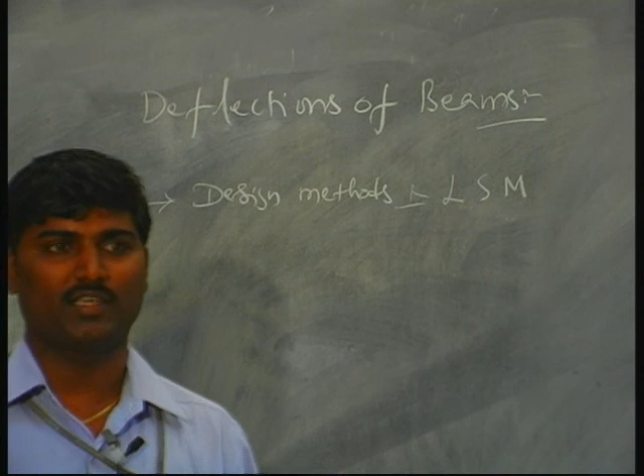Beam deflections are necessary after the limit state method has come into picture. The design methods of beams, the three methods of beam design are ultimate load method, working stress method, and the latest is limit state method. Limit state method requires that any structural member should be safe as well as serviceable. These serviceability conditions have been incorporated in this method. It is adopted in the latest IS code. Hence, deflection calculations are a must to design any structural member using this limit state method.

Working stress method was the method which ensures the safety of a member, whereas limit state method ensures both safety as well as serviceability. Service in the sense, say if in a room a beam deflects excessively, we cannot sit in that room comfortably. A psychological feeling arises that the beam is going to fail; it won't actually fail, but excessive deflection makes you feel that it is going to fail. That is psychological failure of a beam. So, to avoid that, we need to calculate the deflections of structural elements like slabs and beams.

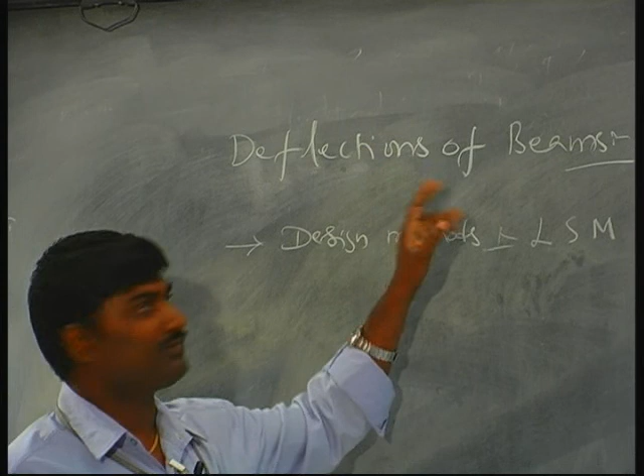Not only that psychological feeling, the flooring will also be damaged. In some buildings, when you walk on the floor, you feel a different sound when you touch any tile. When you put a foot on the tile, we feel a different sound, meaning it has lost its contact with the slab or floor, meaning that the slab has deflected. So the tiles cannot deflect the same amount; the slab deflection cannot cooperate with the tile since the tiles are flat.

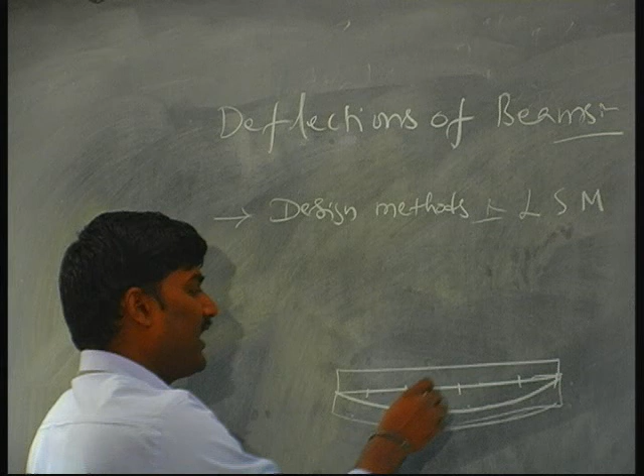Once this top length gets reduced, the tiles have to come closer together, but that facility was not provided. So the tiles will be broken, and sometimes there is removal of the joint between the tile and the floor. This is the problem with excessive deflections in structural elements like slabs and beams.

So, this is the background information on why deflection calculations are required. Deflection calculations are a must to see that a beam serves throughout its designed lifespan and does not cause any damage to non-structural elements like flooring, tiles, or the cover provided for the slab.

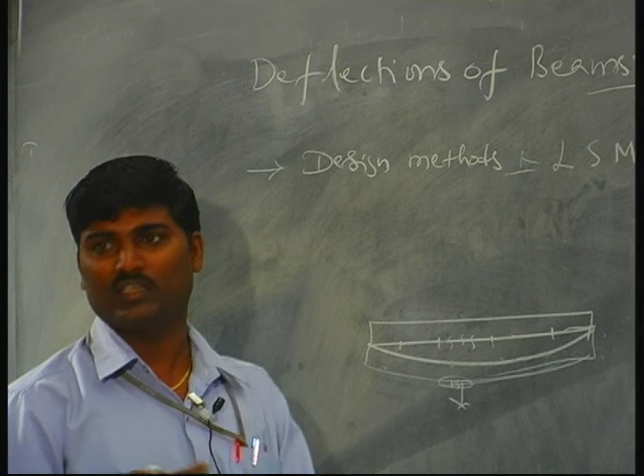Sometimes you will see the cover removed from the slab, and you can see the reinforcement. That problem is because of excessive displacement. Cracking of tiles occurs at the top, cracking of cover occurs at the bottom and falls down, removing cover from the slab, and you can see the reinforcement. Once reinforcement is exposed to the environment, environmental attack happens, rusting, and all that takes place. Steel will no longer serve its job, so failure of reinforcement is failure of the element itself. Because of all these reasons, we want the deflections of beams to be calculated.

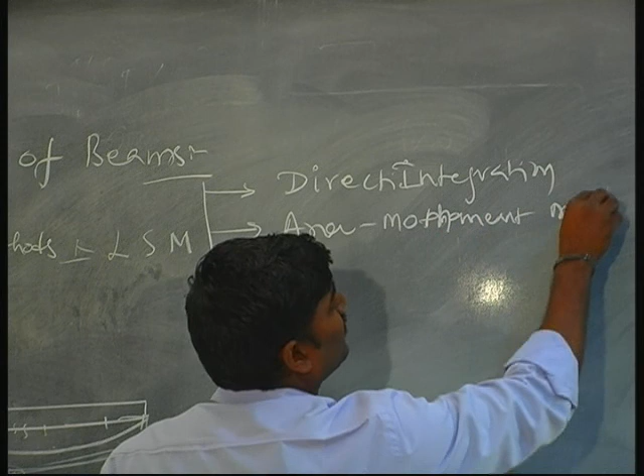There are different methods to calculate beam deflections. The first method is the direct integration method. The second is the area moment theorem, or area moment method. The third is the conjugate beam method. There are three methods to calculate deflections of beams.

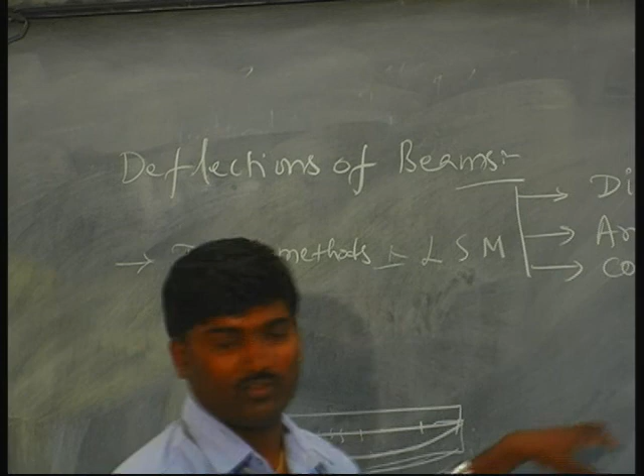Direct integration method was developed by Bernoulli, Jean Bernoulli. You may be knowing this name, a famous name. Scientist Bernoulli developed this method, and it was further extensively used by Euler. After its development by Bernoulli, it was extensively used even for columns by Euler. Euler applied this concept to columns also.

Area moment method is a geometrical one, a simplified geometrical method. That was developed by scientist Mohr. Conjugate beam method is a special case of the area moment method. Each method has its own advantages and disadvantages. We will go on to discuss each one.

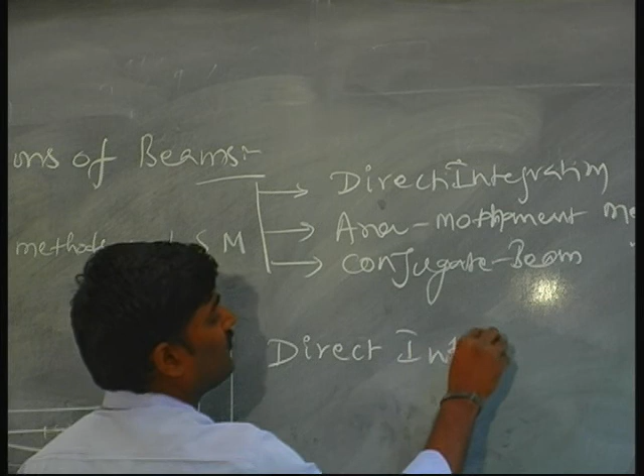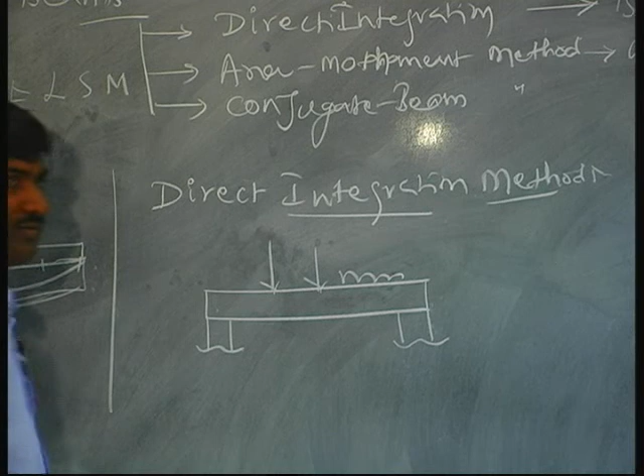First, coming to the direct integration method. It involves integration of some equation to get the deflections of beams. We need an equation which represents the deflected shape of a beam. Generally, a beam is an element where lateral loads prevail on it, provided with some type of support, commonly simply supported, cantilever, or overhanging. If any beam is loaded with lateral loads, it will bend.

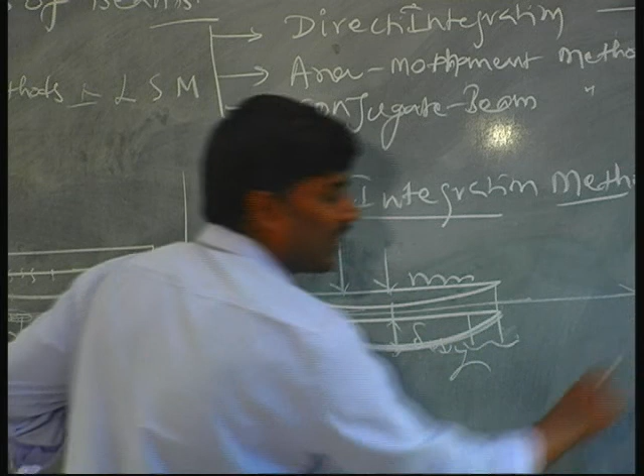The amount of deflection, delta or y, if you have an equation for this curve, I can calculate the value of deflection anywhere I want. For example, if you say this is the x coordinate and y coordinate of the curve, points on the curve will be represented by x, y coordinates.

X denotes the location where we want deflection, y denotes the value of deflection in a beam. If we can have an equation for this, I can find the y value wherever the deflection is required.

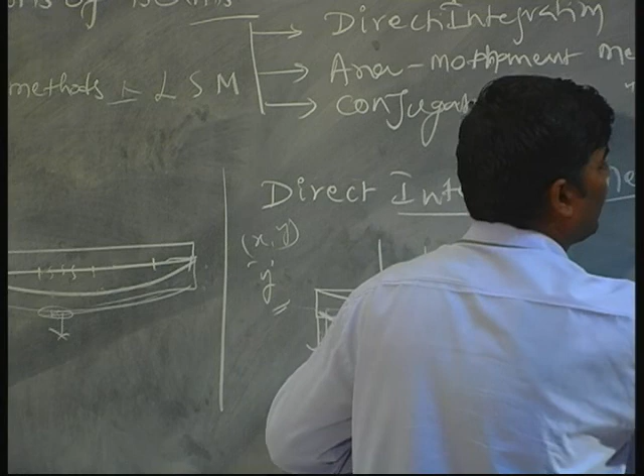The development of the equation for this deformed shape is done in two steps. First, relating strain of a chosen fiber layer in a beam with the curvature of the beam - strain and curvature relation must be established first. Next, moment curvature relationship must be established. Two steps are required to develop an equation for the deformed shape of a beam under loading.

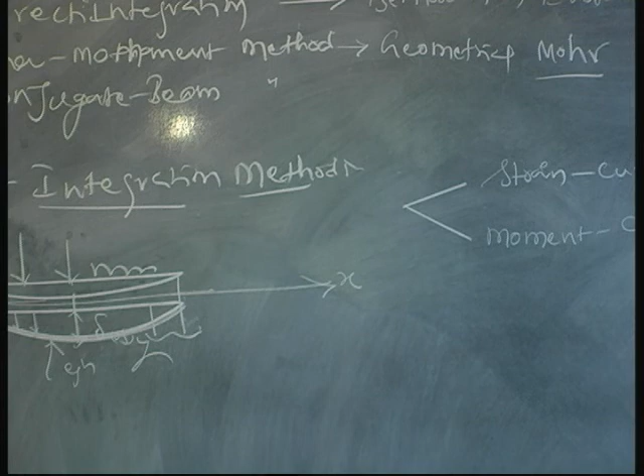These two steps are in fact from simple bending theory or pure bending theory, already discussed in semester 1. Simple bending theory gives you these two relations.

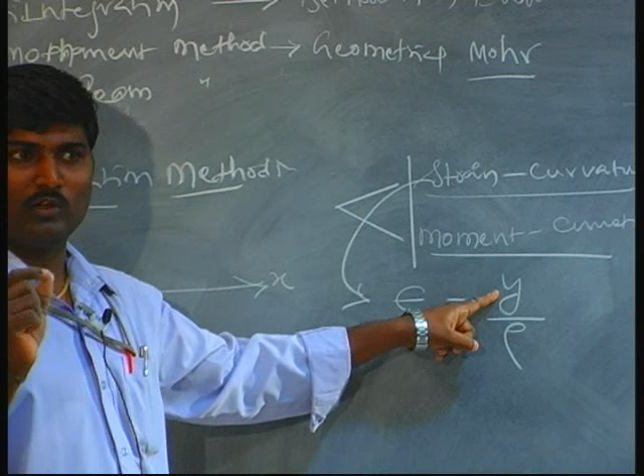I will straight away give these relations. Strain curvature relationship: strain in any layer of a beam is equal to y by rho. Y is the location where the fiber or layer is selected. Rho is the radius of curvature of the bent shape or curve. When you load the beam, it bends in the form of a curve, and the geometrical property of this curve is radius of curvature and curvature - 1 by rho is curvature, rho is radius of curvature. So this is the strain curvature relationship.

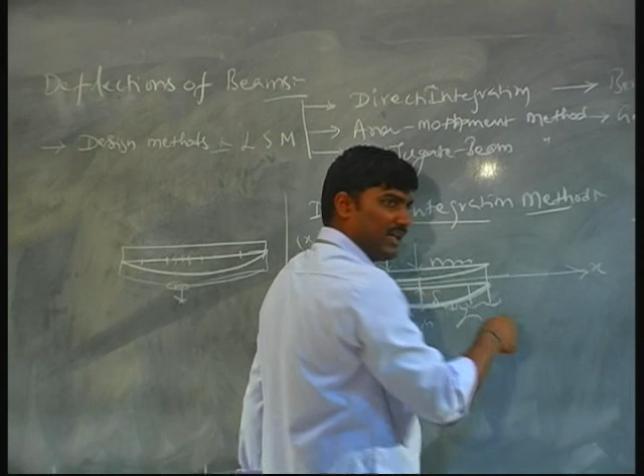Moment curvature relationship is given by the simple bending equation from the first semester: m by I equals sigma by y equals e by rho. From this we have the ready-made moment curvature relationship and strain curvature relationship.

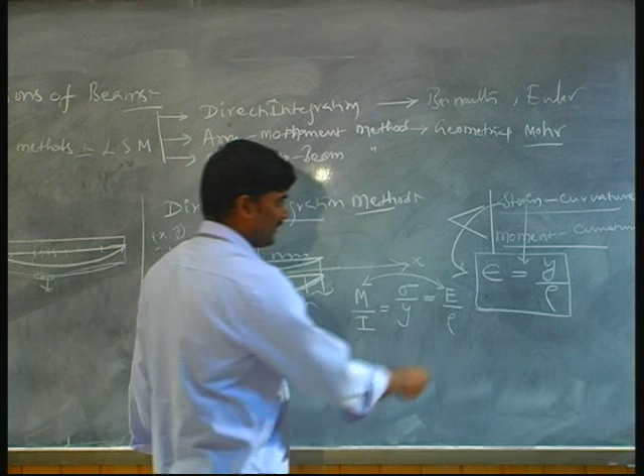Combining these two, we can develop an equation for the curvature of this curve. How do we do that? This is the strain from geometry. We equate that strain from geometry to the strain from theory.

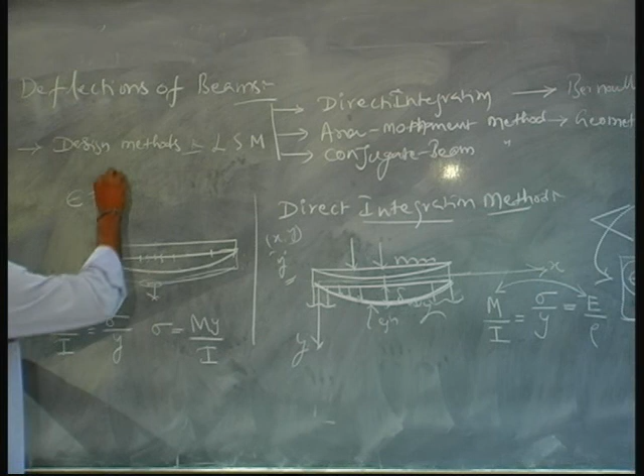From theory, m by I equals sigma by y, where sigma equals my by I. Strain from Hooke's law is stress by Young's modulus. Strain from theory, where sigma equals my by I, gives my by EI. This is the strain at any layer in a beam from theory. Equating strain from geometry and strain from theory: my by EI is equal to y by rho.

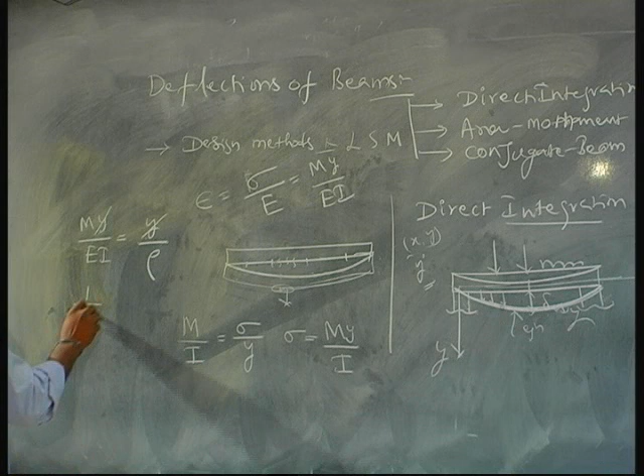Y gets cancelled, so 1 by rho equals m by EI. 1 by rho is the curvature of this bent shape.

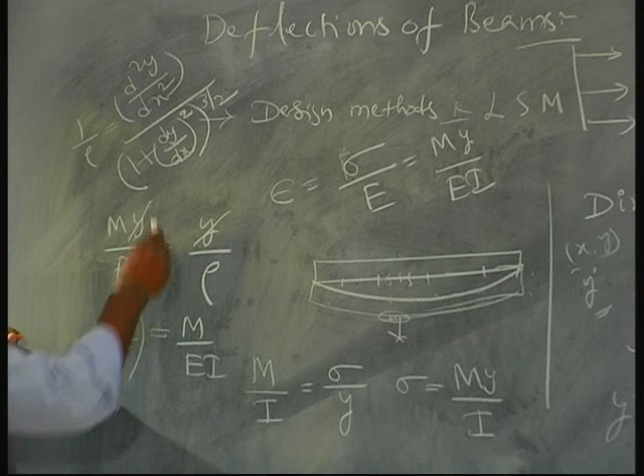From analytical geometry, curvature of any curve can be written in Cartesian coordinates as d square y by dx square, divided by 1 plus dy by dx whole square, whole to the power 3 by 2. This is the curvature of a curve from analytical geometry in the Cartesian system, where the denominator consists of the slope dy by dx.

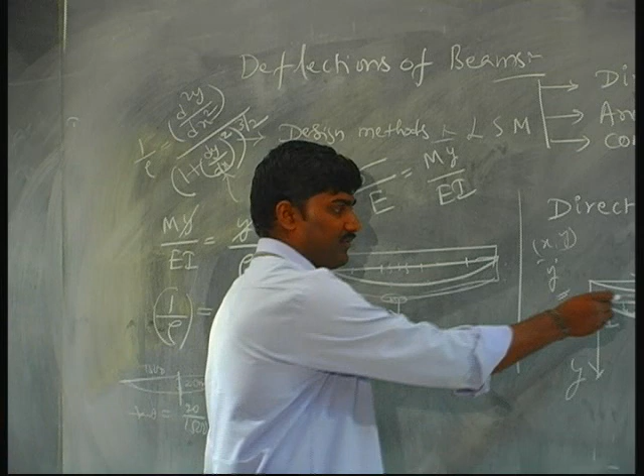For practical cases of beam deflections, generally the beam length is of the order of 3 to 5 meters, say 3000 mm, deflecting by a nominal amount of 20 mm. So the slope of this bent shape: tan theta is 20 by 1500, which is a very small number. So slope is negligible in the case of beams bending as a curve.

So if you neglect this slope, the curvature becomes d square y by dx square. Neglecting this value as negligible, putting it as 0, 1 to the power 3 by 2 makes the denominator become 1, and the numerator d square y by dx square remains the same. So in place of 1 by rho, we replace it with d square y by dx square. This is the expression which helps you to find deflection.

X comma y are the coordinates of points on the curve. Y denotes the vertical coordinate of a point on the curve, which is nothing but deflection. So d square y by dx square equals m by EI, the bending moment at any section relating to deflection. This equation relates bending moment with deflection.

We have a question that in beams, the internal forces generated are three: axial, shear, and bending.

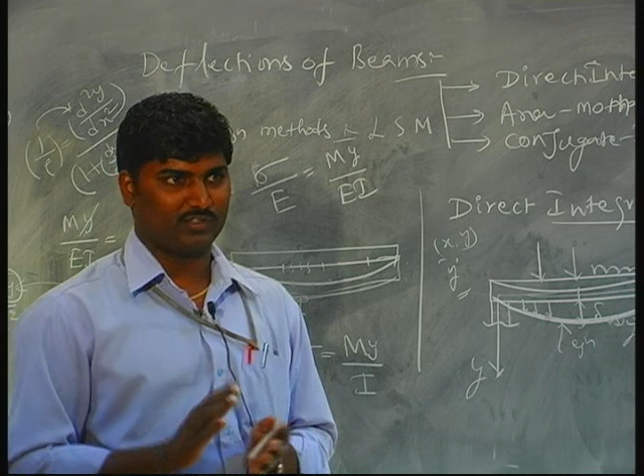Coming to the other two, bending moment and shear force. Shear force is there, but what we are doing here is considering only bending moment; shear deformations are also there but they are neglected. There are theories developed for finding shear deformations also, but they say that compared to deformations created by bending moment, shear deformations are very very less, you can neglect them.

So in total, because of lateral loading on a beam, the deflections can be conveniently calculated without much error with this formula. So the final formula I can give you to calculate deformations by the integration technique, direct integration technique, is d square y by dx square.

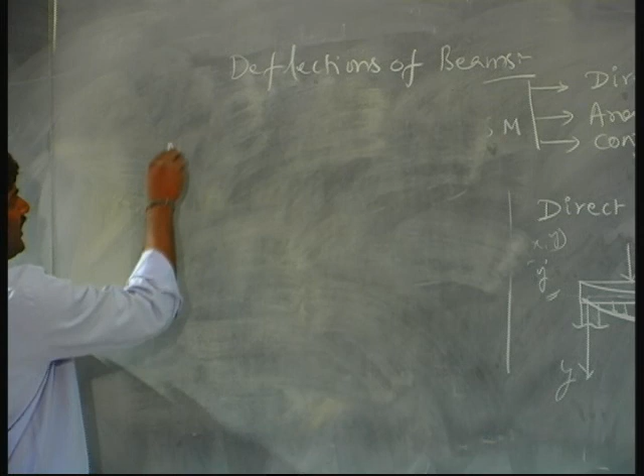This is the equation which relates bending moment to deflection. If we want the y value, we need to integrate this equation twice. That is why the name related to the integration technique is given based on the idea that we have to integrate the equation of the elastic curve, that is the bent shape of the beam, so that we will get the deflection value.

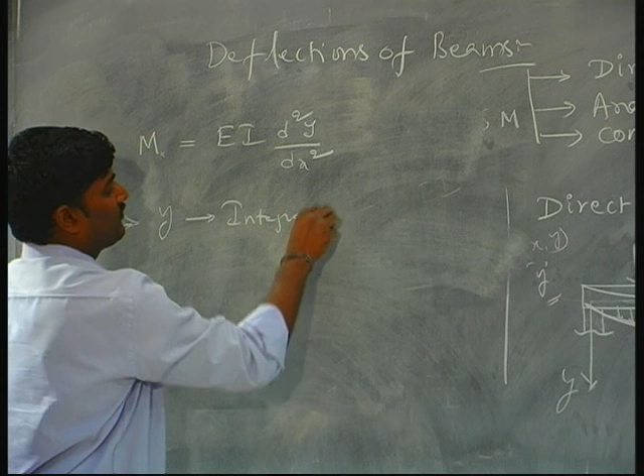So in the integration process, we need to integrate twice to extract y from this. So integration should be done twice. There will be two integration constants, namely C1 and C2.

To evaluate C1 and C2, we must use some known conditions, the boundary conditions, such as depending on the types of supports provided to a beam. Say for example, if you have a cantilever beam fixed at one end and free at the other end, the boundary conditions, that means known conditions to solve the integration constants, are needed.

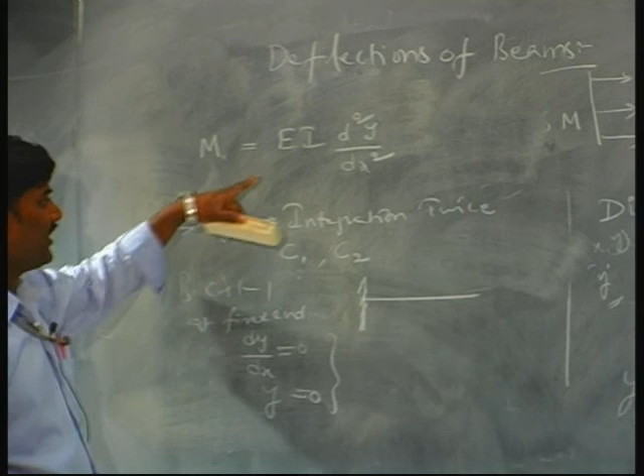At the fixed end, slope is 0, dy by dx is 0, and deflection is 0. Using these two known conditions, which are the boundary conditions, you can estimate y from this equation. This is the direct integration technique which helps you find deflections in a beam.

Let us see an example of how this method is used. A simple example to estimate deflection at any location where you want, using this method. Take a cantilever of length L, which is loaded by a concentrated force P at the free end.

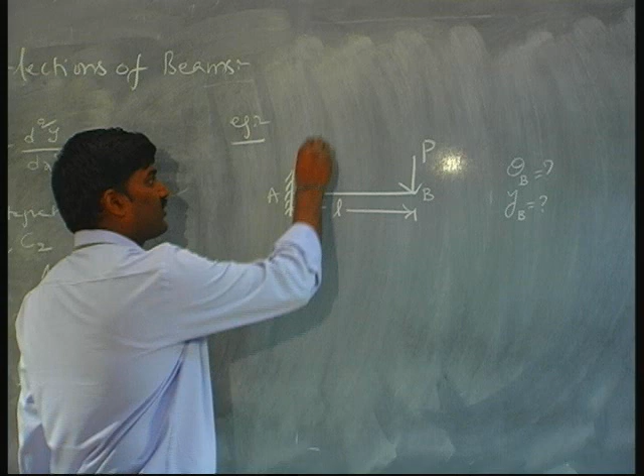Notate the beam AB. I am interested in the slope at B and the deflection at B. To calculate slope and deflection, we know that the beam has got some cross section, so it will have some I value. The beam will be made of some material, maybe steel or concrete, and it will have a Young's modulus.

So, coming to applying this equation to that beam to calculate deflection, let us consider a section where we want to write the moment equation. So consider a section x at a distance of x from A or from B, from either end.

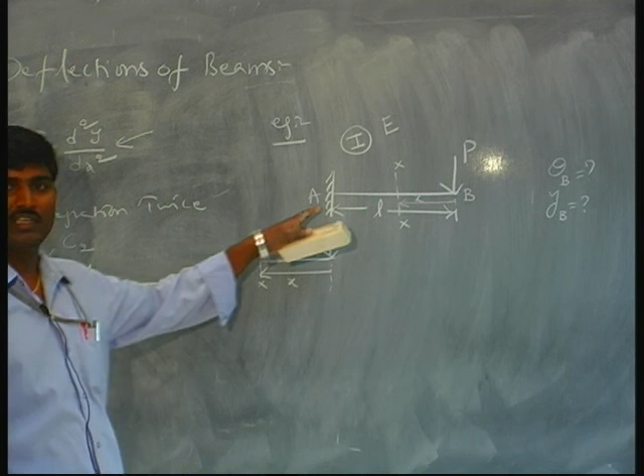Separating that portion, x, force P, x. Why the right part is considered is to avoid support reaction calculation to the left. Moment at a section, from the first semester discussion, is equal to the sum of all moments to the left or to the right of a section. So I am considering here the right of the section.

Sum of all moments to the right side of this section, Mx, moment at x, is force P into x. Considering sign convention, moment causing hogging will be negative, moment causing sagging will be positive. This force into distance causes a moment like this, which will push the beam up, meaning it creates concavity downward, which is called hogging. So it creates a hogging moment, hence we put a negative sign, moment is negative.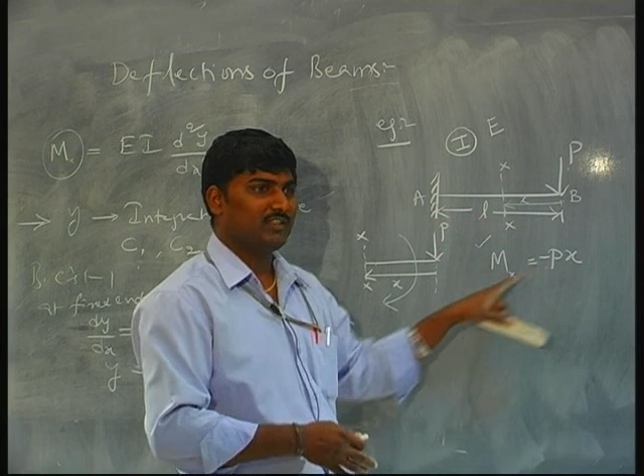This is the moment at any location in this beam. This moment equation represents the moment at any section, at any location. If you go on placing x values, it will give you bending moment values at different sections. If x is equal to 0, bending moment at B is equal to 0. If x is equal to L, bending moment at the fixed support is P into L. So moment can be calculated at any point from A to B.

Applying this in the deflection equation, EI d square y by dx square is equal to minus Px. This is the substitution for moment. If you go on integrating this, say dy by dx, integrating minus P x square by 2, 1 by EI comes into picture plus C1 integration constant. Again integrating that, 1 by EI, x cube by 6, plus C1 x plus C2.

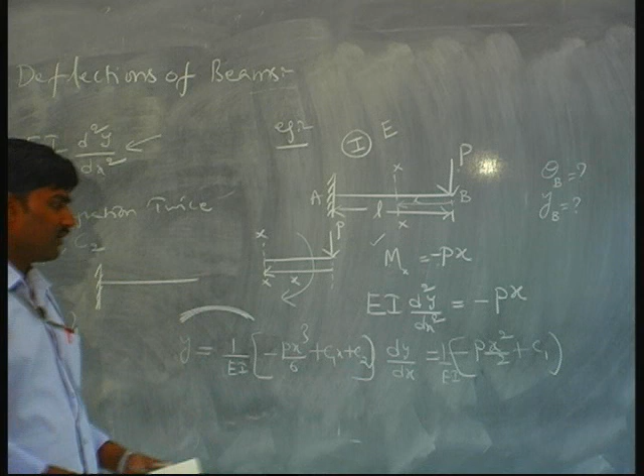These are the two equations which represent slope and deflection at any point in the beam. To evaluate the C1 and C2 integration constants, you use known conditions. If you draw the bent form of this beam, it is likely to bend like this, so the slope at this point is 0, deflection is 0. I am interested in the slope value theta b and the deflection value yb. Those two values will be found from these two equations by evaluating integration constants C1 and C2.

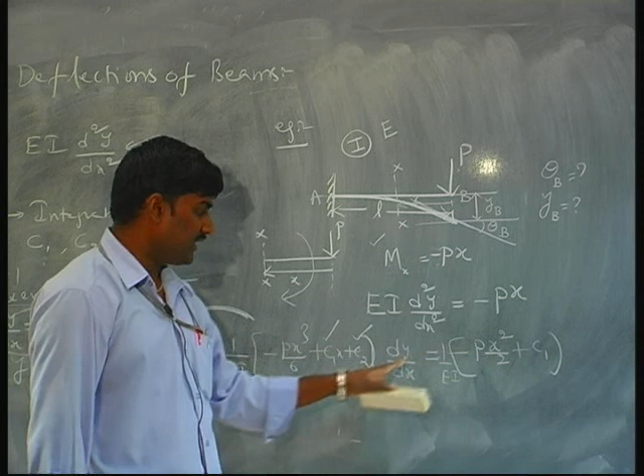For example, substituting dy by dx equal to 0 at the fixed end, x measured from B, so fixed end x value is L. Substituting x equal to L here, dy by dx is 0 at x equal to L is the boundary condition. Substituting here we get 0 equal to minus PL square by 2 EI plus C1. So C1 value is equal to PL square by 2 EI.

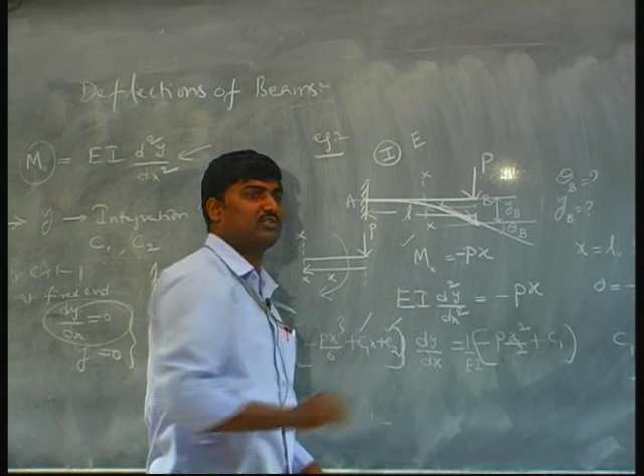Similarly, substituting the other boundary condition x equal to L, y equal to 0, we can estimate C2. Those two equations, after solving for C1 and C2, can be readily used to find slope and deflection values anywhere in the beam. This is the way we apply this method.

Further, this method has got advantages and disadvantages. To overcome them, it is modified or given some simplicities in terms of singularity functions.

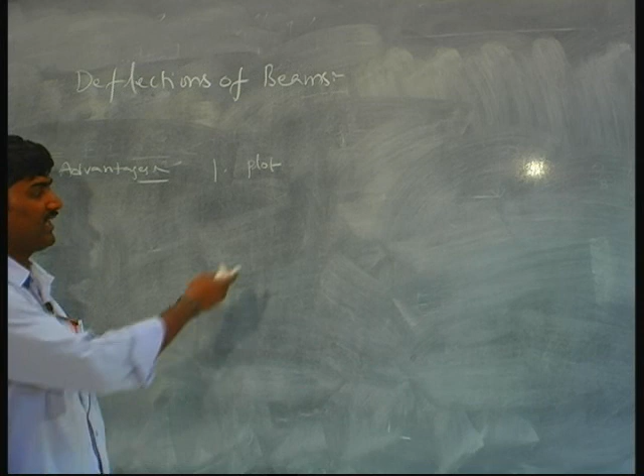That means, advantages: you can plot the deflected shape of a beam. Why? Because we can estimate slope and deflection values at any location with a single equation. So you can plot the deflected form of the beam with a known equation. At any location of the beam, we can estimate deflection at any point we are interested in.

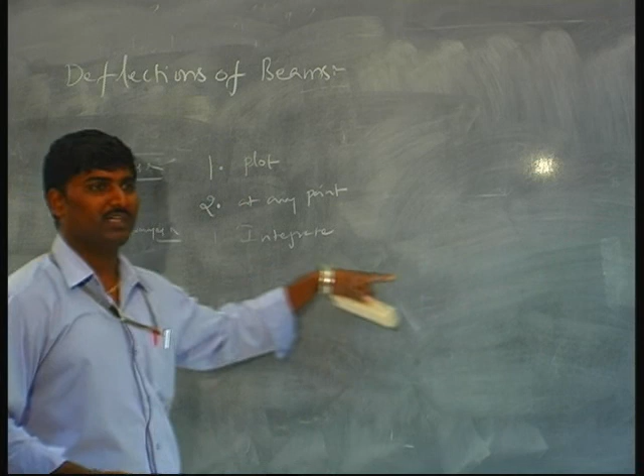Advantages, disadvantages: it involves a cumbersome procedure as you need to integrate. If it is a simple beam and simple loading, the equations are simple. If we go for complex loading, equations become bigger and integration becomes tedious. So the disadvantage is the integration process becomes much more difficult when you go for higher levels of loading and variation in beam cross sections. These are the advantages and disadvantages with this method.

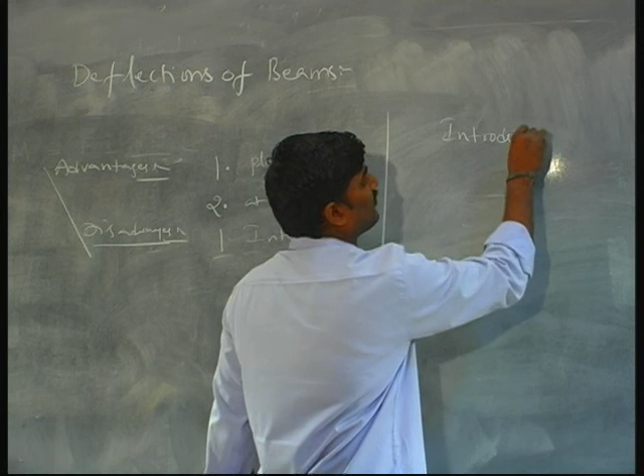To reduce the complexity in case of load discontinuity, flexural rigidity discontinuity, and all that, there is a simplification given to this direct integration technique, called introducing singularity functions, which will reduce the complexity of the problem.

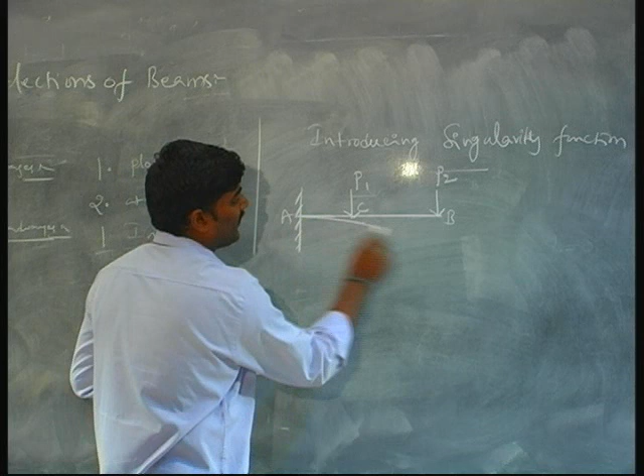How is it done? For example, there is a cantilever beam with two loads, P1 and P2. From A to C, to represent the deflected form of the beam from A to C, I need a moment equation. Upon substituting into the equation for deflection integration, I can calculate deflections from A to C only. The moment equation written for portion A to C is not applicable from B to C, so we need one more equation, a moment equation, which represents this region.

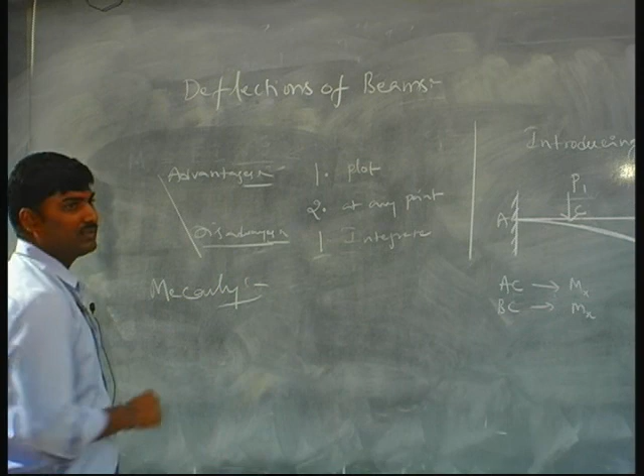So as the number of discontinuities increase in loading, the number of equations go on increasing. It becomes a very lengthy process and the integration becomes much more difficult. Hence, Macaulay introduced a method by introducing some functions which help you write a single moment equation that can be used throughout the beam.

For example, for this beam itself, if you formulate Macaulay's moment equation mx, in direct integration technique we want to separate the beam into a number of portions where the load condition is uniform, and we must integrate to evaluate deflections. Whereas in case of Macaulay's technique, a single equation is sufficient.

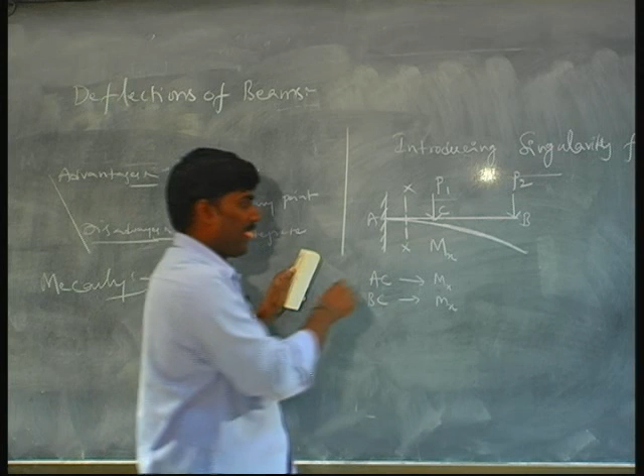Macaulay suggests that you choose a section at either end of the beam. We choose this end of the beam, measure that section from the opposite end of the beam, this one. Locate the section from the opposite end, then write the moment equation.

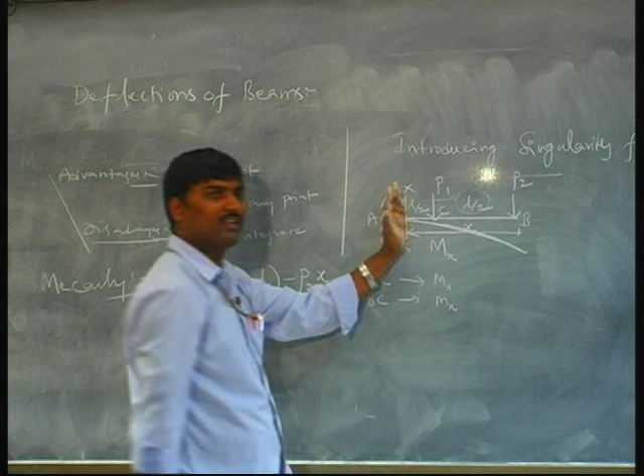Say I want moments at this section, consider the portion from the opposite end. Moment because of P1 is equal to P1 into x minus, say for example, this is L by 2, L by 2, x minus L by 2. P1 into x minus L by 2 is the moment caused by P1 at section XX, which will again be a negative value, creating hogging. Again, moment because of P2 at this section is force multiplied by perpendicular distance, which is x, so P2 into x. This is the moment equation valid from A to B.

No need for two separate moment equations. So this equation, when you substitute in the equation for deflections: minus P1 x minus L by 2 minus P2 x. Macaulay suggested that the multiplying parameter for force, whatever is introduced, must be retained as it is throughout the integration.

Do not alter this function, meaning if I integrate this once, become dy by dx, left hand side, right hand side integration minus P1, integrate it as a single function. Do not integrate this like x square by 2 minus L by 2 x. It should be integrated like x minus L by 2 whole square by 2. It should not be integrated like x square by 2 minus L by 2 into x. Retain the function as it is.

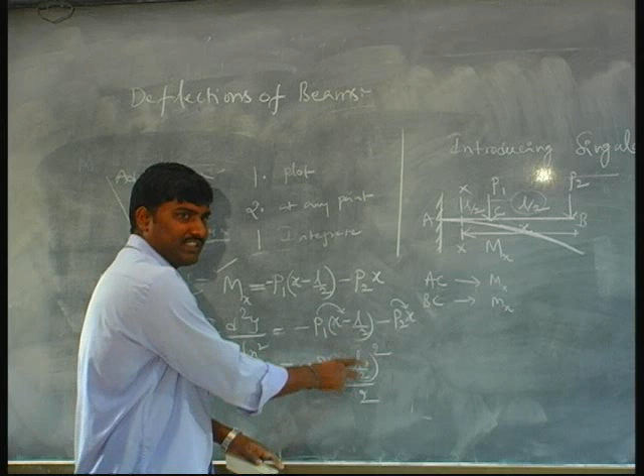Similarly, P2 x square by 2. Further integration should be carried out, which gives you, say for example, y, EI into y is equal to further integration minus P1 by 2. Integration of this function square will be function cube by 3, x minus L by 2 cube by 3. It should not be integrated by expanding this a minus b whole square. The function should be retained as it is, minus P2 by 2 x cube by 3.

The integration constant as usual plus C1x plus C2. So this is the way we go on. The further procedure is similar, like substituting for boundary condition, evaluating C1 and C2, we can formulate a single equation which will give you deflection value for any discontinuity in loading. Whatever may be the loading discontinuity, it will accommodate everything in this moment equation which is suggested to write.

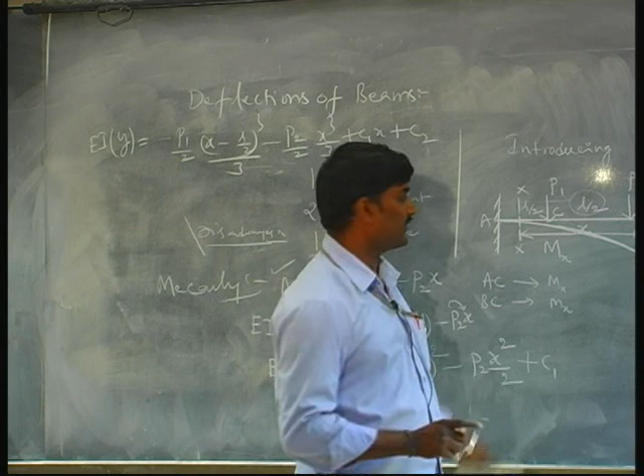The point to be noted is, from Macaulay's technique, it is to be used whenever you observe any discontinuities in loading, discontinuities in EI value, that means flexural rigidity of the cross sections. So the steps to be remembered for Macaulay's technique: first, choose a section at one end of a beam, measure that section from the opposite end, and write a moment equation with the function. Retain the function as it is throughout the integration.

Some more points to be noted when you use Macaulay's technique is, when there is loads like moments, UDLs, when you have an applied moment M on a beam, how to write Macaulay's technique moment equation.

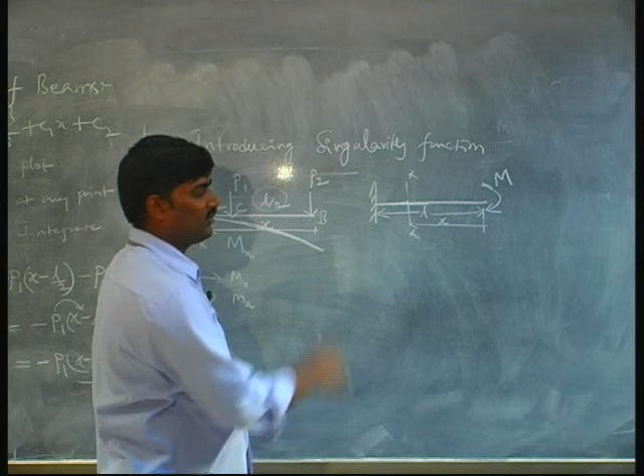We take a section xx measured from the opposite end. Mx is equal to moment at that section, sum of all moments to the right, it is just M, it is negative. So minus M is the value in the moment equation. Whereas if I go on integrate this, EI d square y by dx square minus Mx plus C1, dy by dx, EI into y minus Mx square by 2 plus C1x plus C2.

If I go on integrate like this, the function here which represents the distance parameter of the moment is missing. Whereas it is present here, a force multiplied by a distance function, here it is missing, that function is missing. If you carry out this by direct integration technique, there is no problem, you can carry on. Whereas to use Macaulay's technique, we must introduce a function, a singularity function.

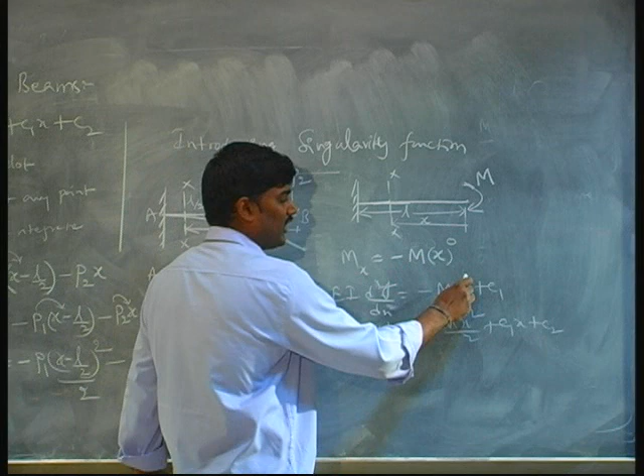What it denotes here is M, at a distance of x power 0 I introduce, M into 1, without any change of value. We do not disturb the value, but we introduce a function. So here x power 0, now comes x power 1, x square, like that. So the function is retained as it is in the integration.

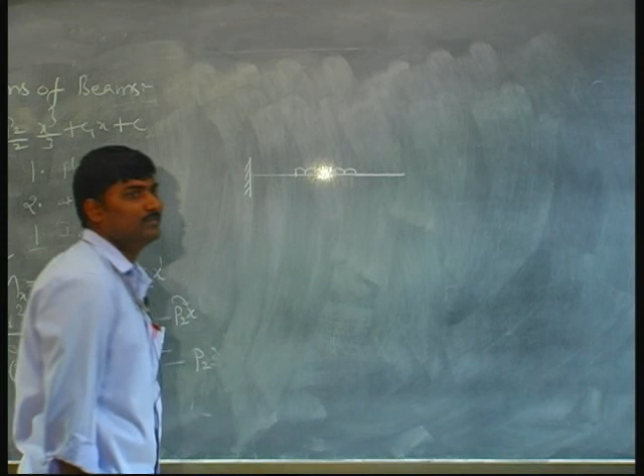So such care must be taken when there are applied moments. Applied moment should have a singularity function power 0, concentrated force should have singularity function power 1. Similarly, UDLs, if we have uniformly distributed load applied on a beam, to write Macaulay's technique, why?

Because you see here, there is no load here, loading condition is uniform from A to C. At C, loading condition is changing, there is discontinuity here, there is discontinuity here, two discontinuities. So the uniformity portions are three.

A moment equation is required in this region, another moment equation is required in that region - so 3 moment equations. If we use the direct integration technique, we need to formulate 6 equations: 3 slope equations, 3 deflection equations, giving 3 into 2, 6 integration constants. This is how tedious it is when you use the direct integration technique.

So if we go for Macaulay's technique, by choosing a section at either end, maybe in this region or maybe in this region, to avoid support reaction calculations, I choose this section. So if I write the mx value - this is W, say L by 3, L by 3, L by 3, 3 regions having equal length, let us say.

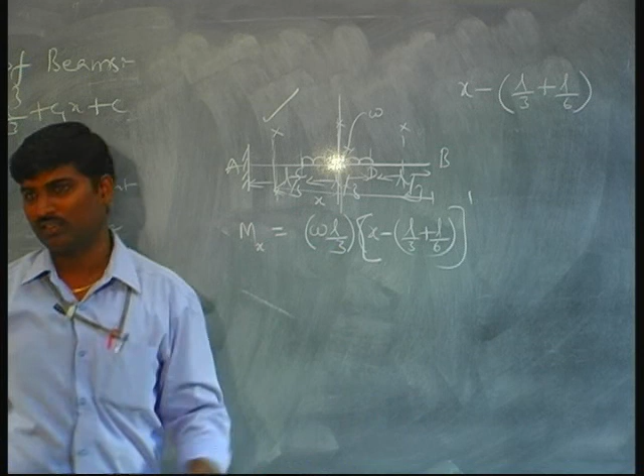Now, if you see the function which is the multiplier of the load having power 1, which is nothing but concentrated load - this moment equation is not representing UDL, it is representing concentrated load. So there is an error committed. The UDL is not represented here, it is representing concentrated load, but actually the beam is having UDL.

How to represent it? If such cases arise, you need to extend the UDL into the portion through the section till the other end, and deduct the same. Now the moment equation changes - this was a wrong representation. The correct representation is by this: now W extending from here to here, A to B.

So moment because of that is W into x minus L by 3, into x minus L by 3 by 2, which is again negative. There is UDL here also, deducted to balance the added one. This is added additionally to facilitate Macaulay's technique. This is deducted so as not to change the given condition.

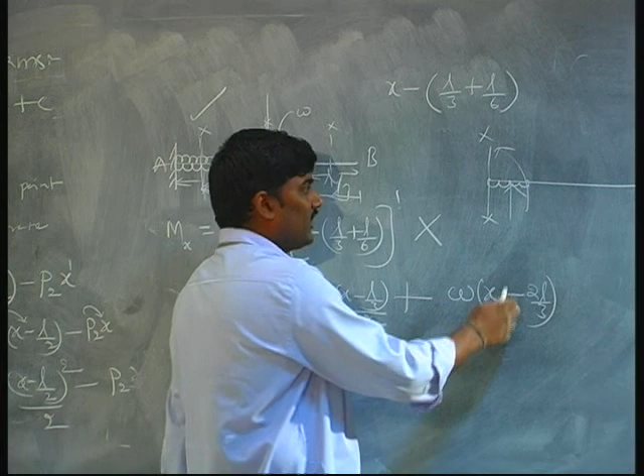So, plus - why? Because this is the beam, this is the section taken, this is the load I have. It is nothing but an upward load which creates a sagging moment. So positive nature. W into x minus the distance up to this, which is 2L by 3 - 2L by 3 is the equivalent load value. Distance from this load to the section is x minus 2L by 3 by 2.

So now see the function: minus W x minus L by 3 square by 2, plus W into x minus 2L by 3 square by 2. This is the moment equation expression. This was originally written without considering Macaulay's idea, and it was giving wrong representation of the load. The correct representation of load is this one.

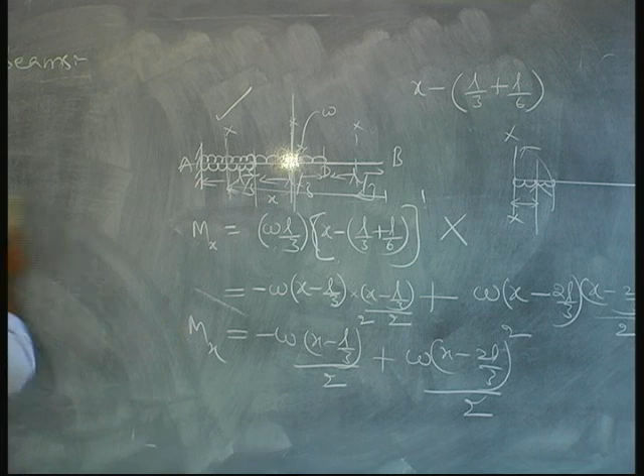Now you see the function, the singularity function is having power 2. So UDLs should have singularity function power 2, concentrated loads should have power 1, moments should have power 0. That is the correct representation of singularity functions, and the function should be carried throughout. This is how the integration technique gives you the deflection and slope in a beam at any location.

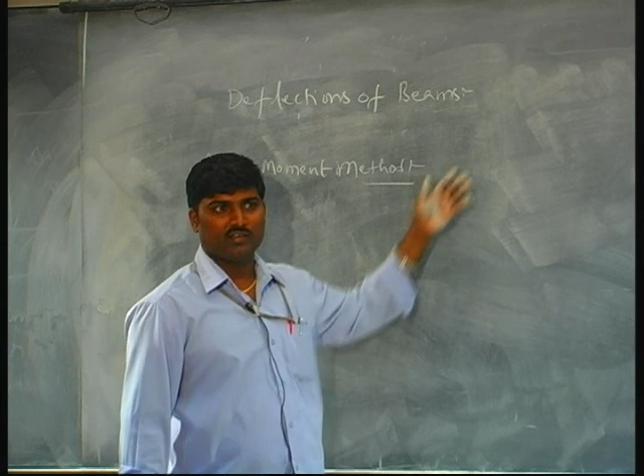The other technique used is the area moment technique. Area moment method is in fact a graphical technique which is used to find slope and deflection of a beam at any location. You can find slope and deflection using moment area method at any location, but one value at a time, not like the integration technique - you can find the value of deflection only one value at a time.

What is this area moment technique, and how do we apply it to find this equation? It is by simply rearranging the equation of deflection: EI d square y by dx square equals mx is the equation of the deflected curve. Just by rearranging we can formulate the area moment method. How is it done? D square y by dx square is mx by EI.

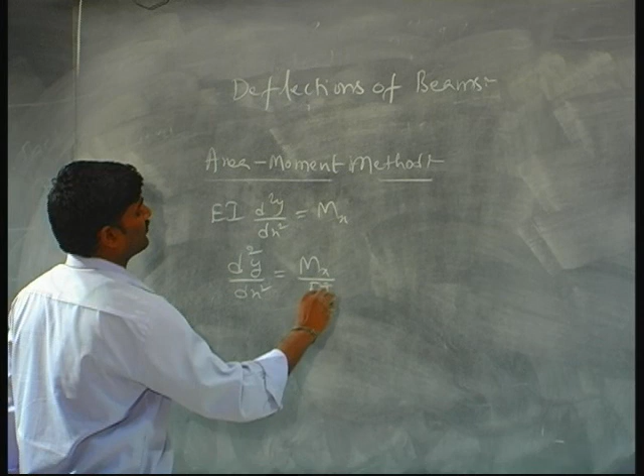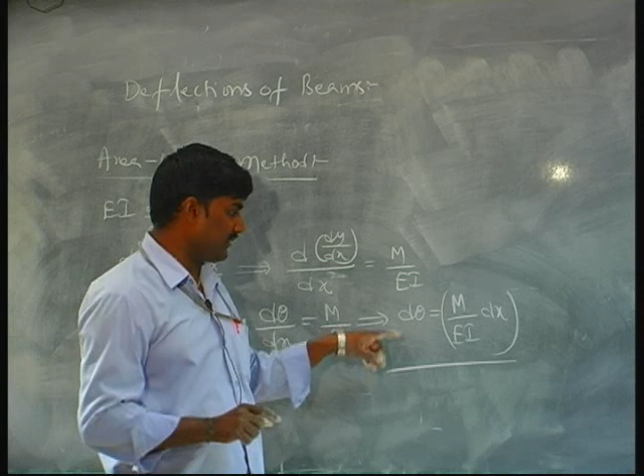Separate the terms there: d by dx of dy by dx equals m by EI, where dy by dx is slope, so d theta by dx equals m by EI. So d theta equals m by EI dx. This is the first relation to be used to find the slope at any point in a beam.

This in fact does not directly represent the slope. One more thing is, the area moment method will not directly give slope and deflection - you have to use geometry in addition to this method to find slope and deflection values. What does this expression say?

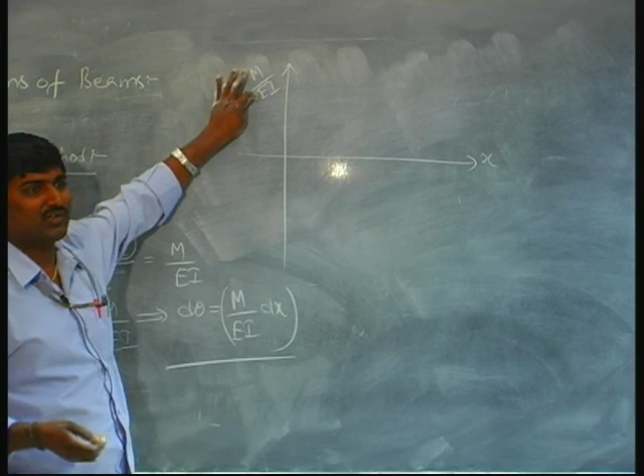If we have a beam, and if you plot m by EI values along the length of the beam - we can plot the bending moment diagram, divide those bending moment values by flexural rigidity, and we will get the curve. The shape of the m by EI diagram may be something like this, I take for discussion's sake.

Consider a beam bending like this. This is the bent shape of the beam corresponding to a particular M by EI diagram. Select any two points on the elastic curve, A and B, draw tangents at B and at A. The angle between tangents A and B is d theta, let us say. Draw the ordinates at A and B.

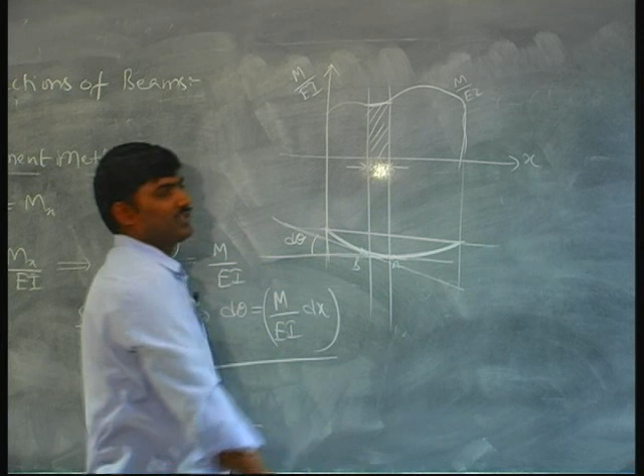Consider a negligible length dx of the beam, so small that the variation of M by EI over it can be neglected and taken as a single value. This value, M by EI into dx, represents d theta, the change in slope between the tangents at the two points on the elastic curve. So, d theta is equal to M by EI dx.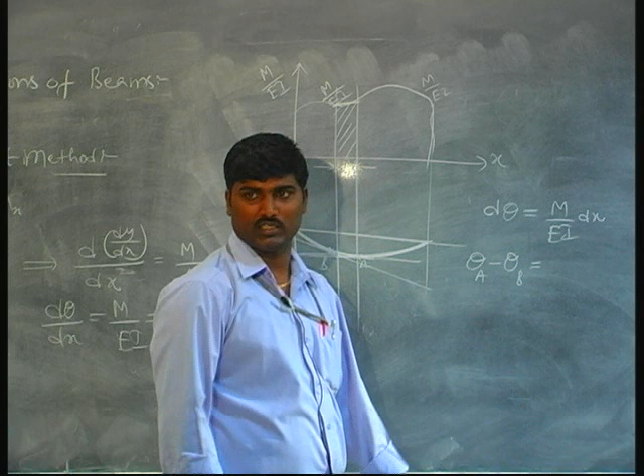How do we apply this to beams? What we considered was a negligible length. If you consider a considerable length in the beam, you need to integrate this, so that for any two known points, theta A and theta B, we integrate from A to B of M by EI dx. So the change in slope between two points is nothing but the total area of the M by EI diagram between those two points.

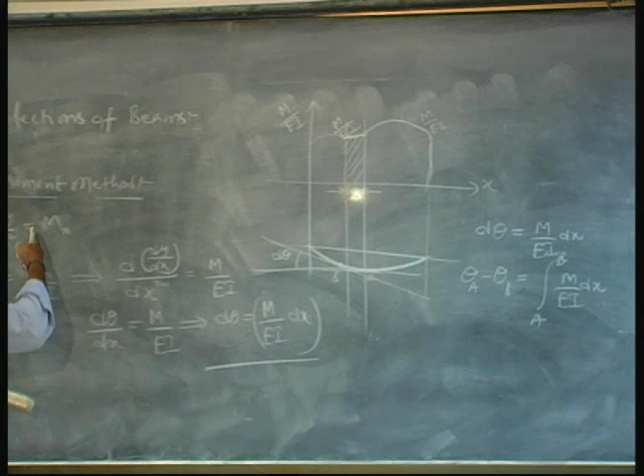So, change in slope is nothing but the total area of the M by EI diagram. This comes simply by rearranging the deflection equation, so that we get the first theorem relating slope with M by EI values. We call this Moment Area Theorem 1.

Moment area theorem 1 states that the difference in angle between any two tangents drawn at any two points on the elastic curve is equal to the total area bound by the ordinates at those two points.

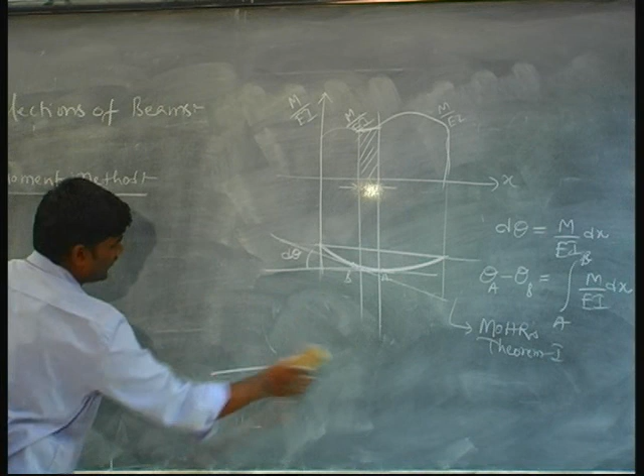Further extending this discussion gives another relation, a helpful theorem to find deflections. Taking the same negligible length portion dx again,

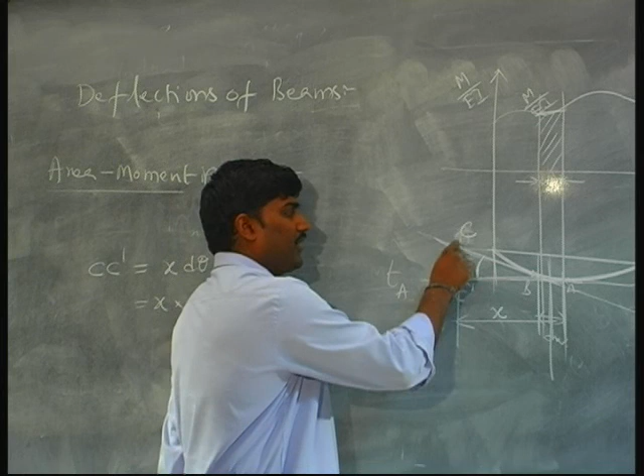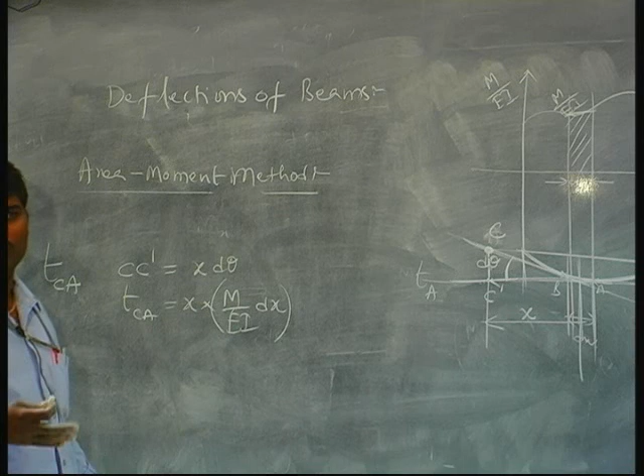So CC dash is nothing but how much this point is deviated from the tangent drawn at A. This is termed the tangential deviation of point C from the tangent drawn at A, TCA. So TCA is nothing but the area of the M by EI diagram multiplied by the distance — area into distance, which from first year knowledge is nothing but the first moment of the area.

This applies for a small length of beam. If you apply it between two considerable points, it becomes the tangential deviation between any two points A and B, and we need to integrate from A to B of M by EI times x dx. From first year knowledge, the integral of a times x is equal to the total area A into the centroidal distance of that area, so we replace accordingly.

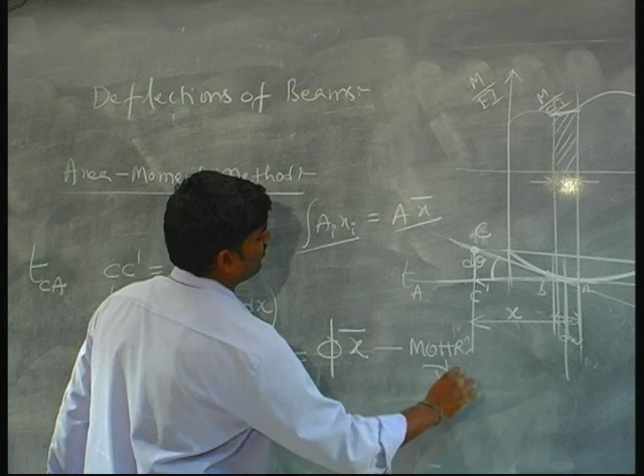So the total area, call it phi, of the M by EI diagram between A and B, multiplied by the centroidal distance x bar. This centroidal distance should be measured from A, because we are calculating the tangential deviation of A from the tangent drawn at B. So wherever you calculate tangential deviation, that is the point from which you measure the centroidal distance. This is the second theorem, which will help relate deflection, though it won't give deflection directly, only the tangential deviation of a point.

How do we use these two theorems to solve problems? Let me give you a simple example.

Concentrated load P, a cantilever beam. We apply the two theorems to find slope at A, B, and deflection at B.

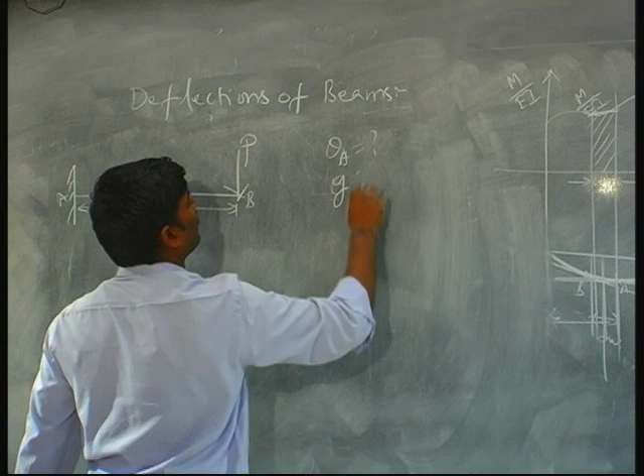So, first theorem suggests that the difference of angle between any two tangents drawn on any 2 points is nothing but the total area of M by EI diagram. So, first we plot the M by EI diagram for this. Bending moment is 0, bending moment is P into L, and in between it is a straight line.

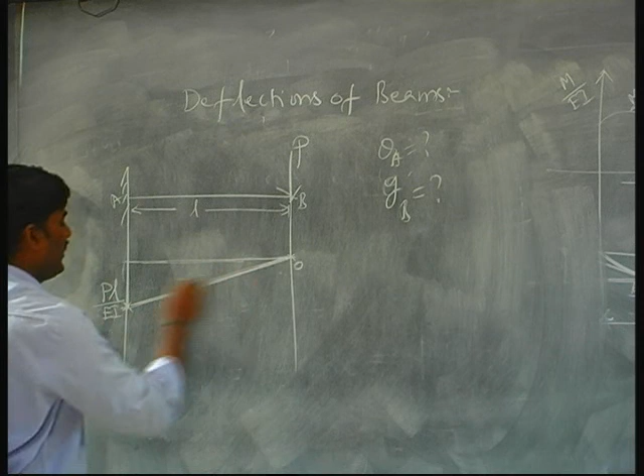Divide all the values by EI, this will give you the M by EI diagram. This is the M by EI diagram. Choose any 2 points on the elastic curve. Draw the elastic curve, that means the bent shape of this beam.

I choose 2 points A and B on the elastic curve, this end and other end. Draw 2 tangents. Tangent at A is nothing but the horizontal line. Tangent at B, this is TB.

2 tangents are drawn. So this is nothing but the line parallel to TA. TA is a horizontal line, it is also a horizontal line. So this is representing theta B. So theta B minus theta A is equal to the total area between A and B.

This total area is a triangular area, half BH. Theta A is 0, theta B is equal to PL squared by 2EI.

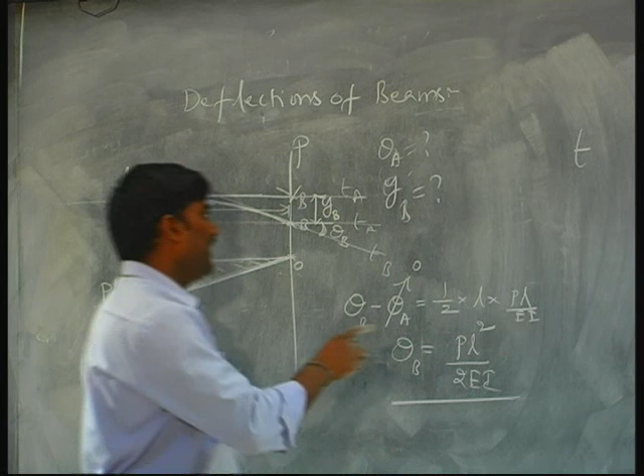Application of the second equation, Mohr's second theorem, is that I want to find this value YB, the deflection value. Because of this load, end B has come down to this position.

So the second theorem says that tangential deviation - I want the deflection of B. So choose point B, draw a tangent at A which will be a horizontal line. Let us find the tangential deviation of B from A, tangent drawn at A, tangential deviation of B.

So the tangential deviation of B I want from the tangent drawn at A is nothing but the first moment of the area between A and B from point B. So from this you measure the centroid of this total area, x bar. X bar should be measured from the point where you are calculating tangential deviation.

We are calculating B dash value. B is the point on the elastic curve, B dash is the projected point onto the tangent. B dash is the deviation, tangential deviation. So total area is half BH.

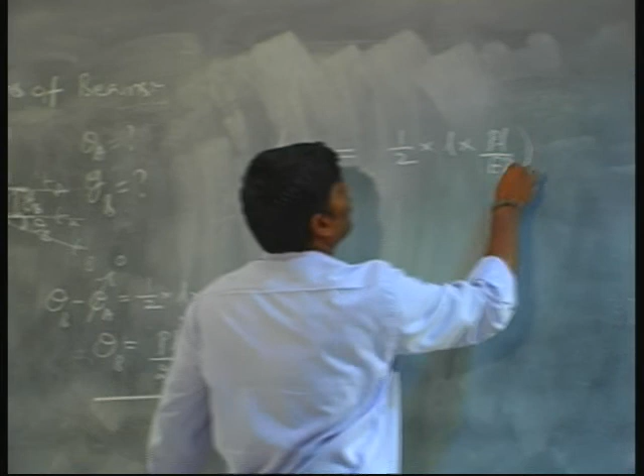Centroidal distance is 2/3 of L. It is a triangle, from this end it is 1/3, from that end it is 2/3 of base. So it is nothing but PL cube by 3 EI, 2 and 2 gets cancelled.

TBA, tangential deviation of B from the tangent drawn at A, is nothing but B dash, which is nothing but YB, deflection YB. So deflection can be calculated straight away by choosing the tangent at A. Hence this becomes a simple case. So this is the application of the moment area theorem.

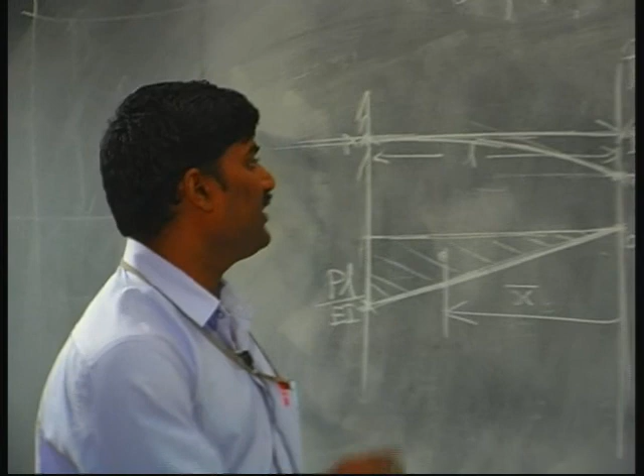For a simple case I have discussed, we can extend this to any type of problem, where the difficulty comes is when you have UDL, the bending moment diagram will be a second degree curve. When you have a triangular load, the bending moment diagram will be a third degree curve. So to estimate geometrical properties like area, centroid will be difficult.

Hence this moment area technique is best applicable up to concentrated loads. Furthermore, if you want to apply it, it will be up to UDLs. Beyond that, this method is not suggested. Still, you can solve if you can estimate geometrical properties correctly.

So the third method to be discussed is the conjugate beam method, a special case of moment area theorem. Time will not permit, we will discuss it in further lectures. Thank you very much.